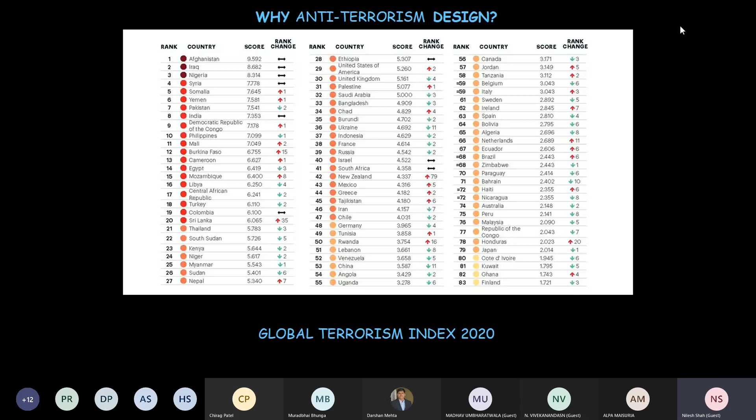So India has a GTI of 7.4, Pakistan has a GTI of 7.5, Yemen has GTI of 7.5, Somalia has 7.6, Syria 7.7, and Afghanistan tops it with a GTI of 9.6. So out of these more than 150 countries of the world, India stands at rank number 8, suggesting that the impact of terrorism is very high for our country.

Now, this is a comparison of top 10 countries over past many years as far as terrorist activities are concerned in terms of the GTI score which the country will carry. As shown here, every one of us will be surprised to know that in 2002, the rank of Afghanistan was 16, and it carried forward until 2004, where the Afghanistan rank was more than 10 from GTI of all the countries.

But from 2005 onwards, this rank kept on increasing, and in 2018 and 2019, Afghanistan has topped the GTI, meaning that the impact of terrorism is highest in Afghanistan amongst all countries of the world. Iraq over last decade has remained at rank number 1 to rank number 2. Nigeria rank number 3 to rank number 4. Syria 4 to 5 over last 5 to 6 years, and Somalia has come to rank number 5 in 2019.

If you look at Pakistan, then even in 2002, you will realize that Pakistan was ranked at number 12, while India was ranked at number 2. In 2002, 2003, 2004, and 2005, up to say 2011 or 2012, India's rank was from 2 to 5 only, which is, I think, a great matter of concern for all of us.

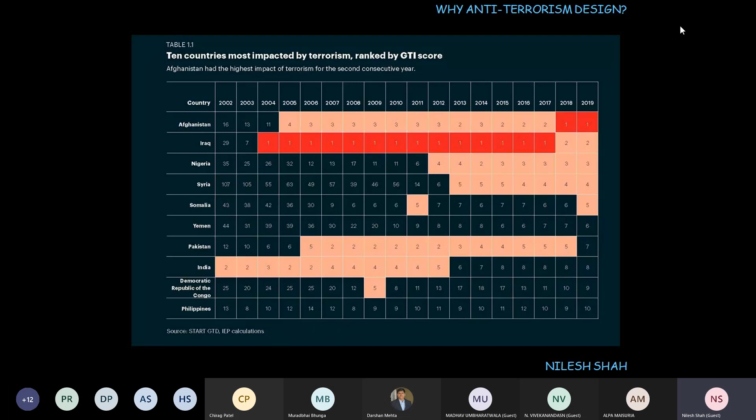So, a lot of improvement has been done in India from 2002 to 2019 to bring the GTI index down from rank number 2 to rank number 8, while Pakistan in 2002 was ranked at number 12, and the rank has increased in 2019 to rank number 7, right? So considering all these aspects, we cannot say that India is a country where terrorist activities are not there.

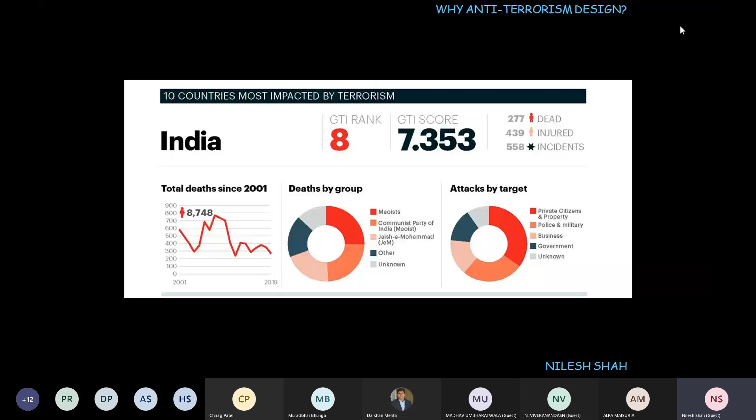So why anti-terrorism design is required? Because our infrastructure, our properties, or our buildings that we are designing are subjected to terrorist attack. India ranks amongst top 10 countries in the world where the impact of terrorism is very high, and this impact results in loss of life of people. This impact results in the disturbance or the collapse of the infrastructure facilities as well as building facilities or properties of an individual or the government.

That is why we as an engineer should be involved in planning the anti-terrorism strategies for the whole country, with specific reference to design of infrastructure and buildings. That is where civil engineering and structural engineering will come in picture. That is where architectural people will come in picture.

There has to be a trend started in near future, that those buildings which are very important, those buildings which are in a certain likelihood of terrorist attack kind of neighborhood, should be compulsorily designed for a specific threat level, for a specific type of terrorist attack strategy. The days are not far away. I see that this will be an immediate future and this will be required in future,

though there are no standards available currently, right? So that is the first part of the presentation, why anti-terrorism design is required, because India is very much susceptible to terrorist attacks. A lot of lives are lost, a lot of property is damaged, infrastructure is lost. Therefore, we must try to design our infrastructure as well as property for anti-terrorism concept.

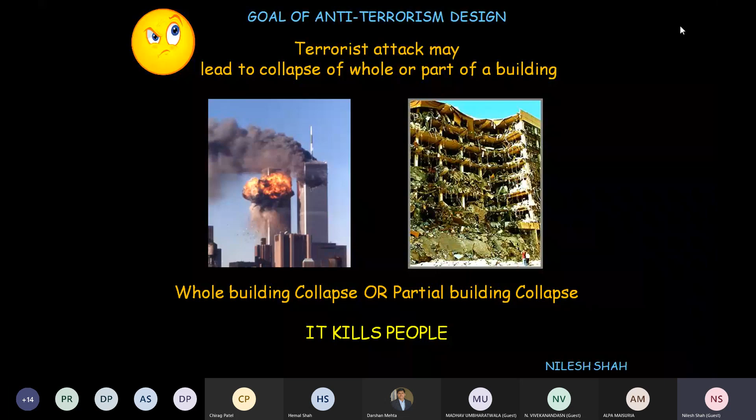So we may not be able to prevent or eliminate terrorist attack as a civil engineer, structural engineer, or an architect. It's not our job. It's not within our domain to prevent and eliminate the terrorist attack. The onus falls onto the shoulders of the authorities, right? But we can design buildings to prevent collapse under terrorist attack, right?

So what is the goal of anti-terrorism design? Like in earthquake resistant design or wind resistant design, the goal is to minimize the loss of human life. Likewise, here also, the goal of anti-terrorism design is to minimize the loss of human life. How do we minimize this?

We design our buildings to sustain a specific threat level, a specific type of terrorist attack, a well-defined terrorist attack, so that when that specific type of terrorist attack takes place on a particular infrastructure or a building, or a certain level of threat is realized during its useful lifespan, then the building does not collapse, or the local collapse of the building does not take place, killing people, right?

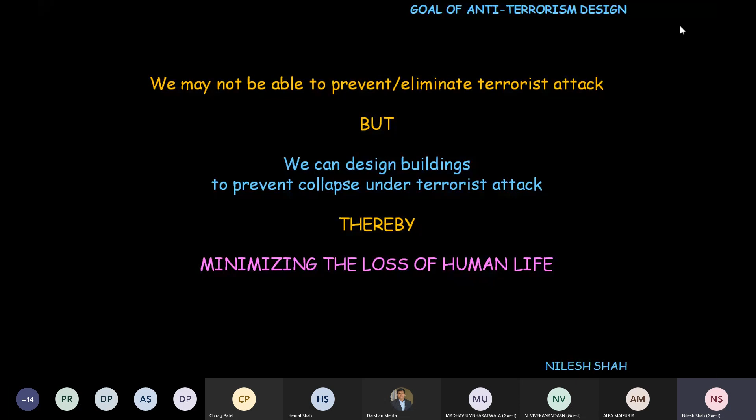So our design goal should be to minimize the loss of human life by making buildings which do not collapse due to terrorist attack for a specific threat level and for a specific strategy. Okay, now we have been talking about various terrorist strategies, right? That for a particular type of terrorist strategy, we should be able to design buildings. So let us know about various anti-terrorism strategies.

There are actually 4 anti-terrorism strategies listed here. First is deception. Second is intelligence measures. Third is physical and operational protection. And fourth is structural hardening.

Now, when I say these are the anti-terrorism strategies, many of these are terrorism strategies also. That is, the terrorist would be using many of these strategies too. For example, deception - the terrorists may use this strategy.

If you have seen old movies like James Bond movies, or any of our old Hindi movies of the 1980s - in Hindi movies there used to be a person who does a lot of charity in society and has a very good impression, like he is a great donor, a helping hand to the poor people of society. But in fact he has constructed his own bungalow such that they have a bookshelf in the bungalow, but if you move the bookshelf, it opens to a den, and this den is the area from where he carries out all illegal activities, maybe smuggling of gold, or distribution of liquor or drugs in the society.

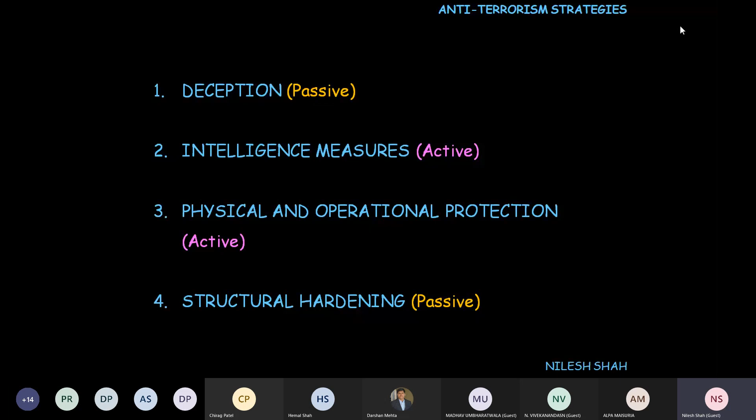So basically there are four anti-terrorism strategies: deception, which is a passive strategy; intelligence measures, which is an active strategy; physical and operational protection, which is an active strategy; and structural hardening, which is a passive strategy.

So what is deception? A building or facility is made to appear more low risk or more protected, and therefore the attacker is misdirected. If you have a very important building to be protected, you change the appearance of the building so it appears from outside as, say, a hospital, while in fact it is the main headquarter for an intelligence agency, a government treasury, or whatever. So people from outside do not realize it is a particular facility, and the attacker is misdirected, not realizing this is the target he is looking for. So it is a passive kind of strategy.

Second is intelligence measures, an active type of strategy. It means understanding, preventing, and preempting the moves of the terrorists. This is what the Intelligence Bureau, RAW, and other agencies in each country, or the FBI, have been doing - keeping their eyes and ears open. They have agents moving around in society to find out likely terrorist attacks based on clues available through telephonic discussions which they trap, or through videos or cameras. So intelligence measures is an anti-terrorism strategy which helps prevent or counter a terrorist attack. For example, we had earlier indications that on a particular day like 15th August or 26th January, certain cities of Gujarat or Maharashtra were likely to be attacked by terrorists. In the past, such awareness was created among government authorities, and they were requested to take full protection measures to curb any likely attack. So this is intelligence measure, an active type of anti-terrorism strategy.

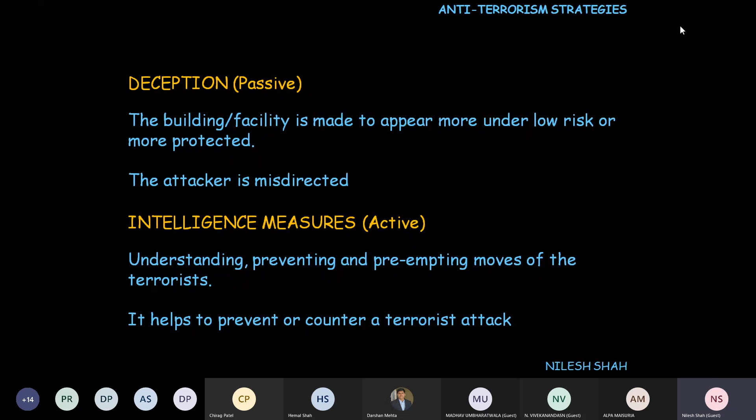Physical and operational protection is also an active type of strategy, which includes CCTV surveillance, providing security measures including security guards and other security barriers, providing sensors, etc., to help identify, prevent, and counter a terrorist attack. As you all know, around 6 to 7 years ago, the city of Surat was perhaps the first city in the whole of Gujarat, or the whole country, to install CCTVs in public areas - on public roads, malls, near cinema theaters, and everywhere for surveillance. That has helped reduce the crime rate to a great extent, and whatever crime takes place, it is very easy to find the culprit. So physical and operational protection facility is an active type of anti-terrorism strategy, now getting involved in several cities through CCTV surveillance, security barriers, security guards, and specific sensors being installed in public areas.

Next is serpentine access. This is also very important - providing fences, perimeter protection, buffer zones, etc. If you have a very important building, and you provide access from the road to that building's entrance, usually to reduce the cost of infrastructure, roads, or approaches, we take the minimum distance - a straight line from the road directly to the entrance, providing the minimum length of road. This should be avoided in anti-terrorism design, because a shortest distance or approach to the entrance means terrorists will reach the entrance in minimum time, without you noticing them, or without security and other people getting enough time to counter their attack.

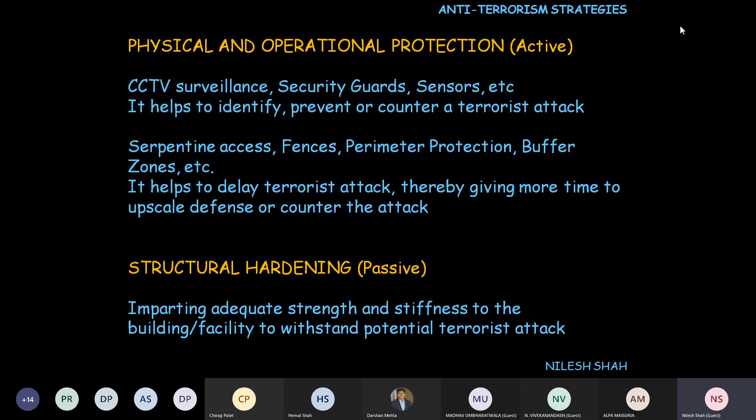So we have gone through four types of anti-terrorism strategies. Of these, the first three - deception, intelligence, and physical and operational protection - are, in fact, also used by terrorists as terrorism strategies. As they say in Hindi, loha lohe ko kaatata hai - iron cuts iron. So whatever strategies terrorists are using, the same strategies can be used for anti-terrorism also. That is the idea of defense strategy.

Now, usually or ideally, any building designed for ATD, anti-terrorism design, should have all four measures placed in layers. When I say placed in layers, it means the attacker will encounter them one by one in sequence. For example, as shown in this chart, first the attacker will encounter the deception strategy, then the intelligence strategy, then the physical and operational protection type of strategy, and then the structural hardening type of strategy. So when all these four anti-terrorism strategies are put into sequence in any order of priority, the attacker will have to spend a lot of time.

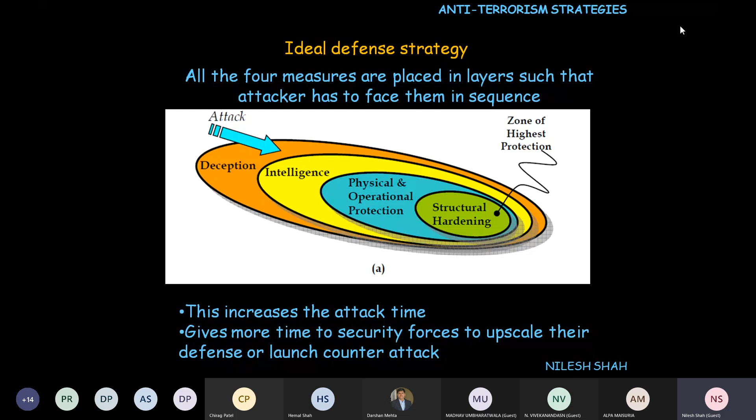Okay, what actually happens in practice is that the defense strategies will overlap and they may appear together. For example, I have shown a zone of highest protection at the core, at the center, and then the different strategies will overlap each other. So there may be an attacker who chooses a particular type of approach wherein he has to encounter only deception and physical operational protection, and then structural hardening. So ideally the strategy should be planned in sequence so it is encountered one by one, but practically it is seldom possible, and the strategies would overlap with each other. We have to keep this in mind.

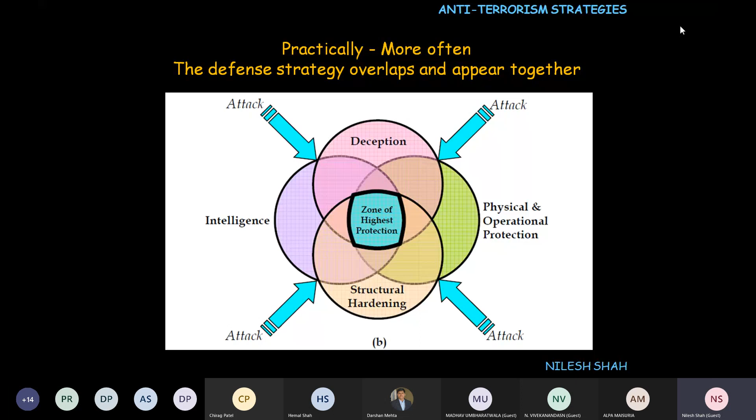Okay, so we have been through all these strategies, like four strategies that we have seen: deception and intelligence measures, and physical and operational protection, right? They are general, common. But as an engineer, we are most concerned with the last anti-terrorism strategy, which is called structural hardening, right? It is the final and most important frontier of anti-terrorism design, because the other strategies that we had visited are kind of preventive strategies, while this is the strategy which will actually save the lives of people when the building or infrastructure facilities are attacked.

Because by structural hardening, our goal is to prevent the collapse of the building so that the people inside the building and the data or the objects inside the building are not affected by it. Okay, so when all other measures fail, structural hardening helps in saving the lives of people. It can give you more time to facilitate evacuation. It will also give you time for rescue. It will prevent the collapse of the building and prevent injuries from flying debris of non-structural elements, right?

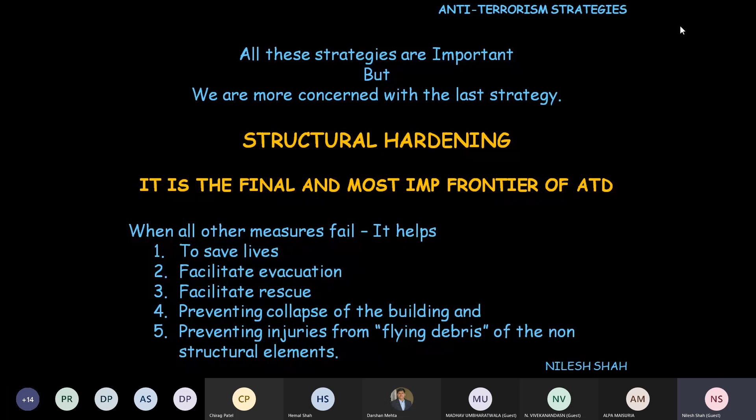So structural hardening is the anti-terrorism strategy which we are directly dealing with as a civil engineer, as an architect, or a structural engineer, right? So architects, civil engineers, structural engineers shoulder added responsibilities to mitigate the effect of terrorist attack. Now, how do we deal with structural hardening? We can design buildings to withstand terrorist attack without collapse and protect the lives of the people.

Do you remember what was the goal of anti-terrorism design? It is to minimize the loss of human life by designing buildings which do not collapse during a terrorist attack, right? Okay, so we are through with different types of anti-terrorism strategies. Let us identify various issues in anti-terrorism design, and then we will have an overview of ATD.

In the meantime, are there any points for discussion from the participants? Then I'll be happy to attend to them. I hope all of you are attentive to the presentation. Are there any points for discussion? We can discuss it right now. Darshan bhai? Yes, Nilesh sir. So I feel, I don't know how many of the participants are attentive. Those who are attentive can just raise their hand. All the participants are requested to write in the chat box, either yes, no, whatever, so that I can realize whether you are attentive or not. Because we don't want one-way communication. We want an interactive session. Exactly. So I can see four or five hands up. That is really good. But those who wish to interact right now can interact based on whatever has been presented till now. It is open for everyone.

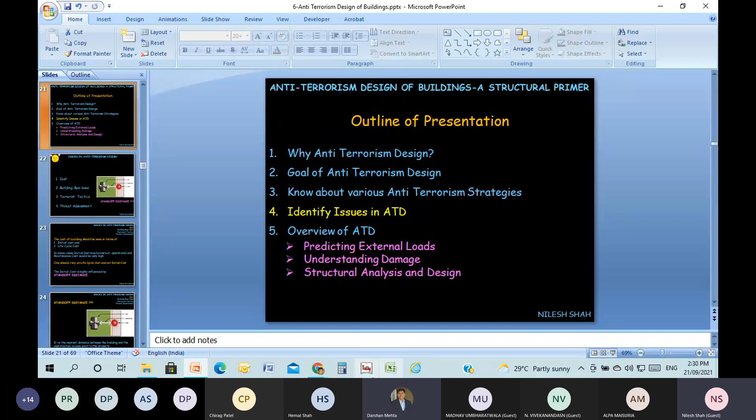So let us identify various issues involved. Sir, there is one question from Arora sir, who is a professor in GEC Bharuch: do we need to design blast resistant buildings? How to consider energy? Yeah, exactly. Arora ji, when we come to the analysis and design part of this, I will highlight that, because terrorist attack through explosion is the main thing for which we have to design. And for a specific type of explosion, how to evaluate the load, that I will highlight in the presentation.

But as I told you earlier, it will be only conceptual things that we will be discussing here, and I can suggest several references which would be very helpful to you in designing, right? So we are going to discuss that. So I hope you will wait for a few more minutes till we reach that particular topic. Is that okay?

Okay, shall we move ahead then and identify issues in ATD? Okay, what are the issues in anti-terrorism design? Again, this is from a general perspective, not only from the engineering point of view. The four major issues with anti-terrorism design are: first, cost; second is building bylaws; third is terrorist tactics; and fourth is threat assessment. We are going to see each one of them one by one.

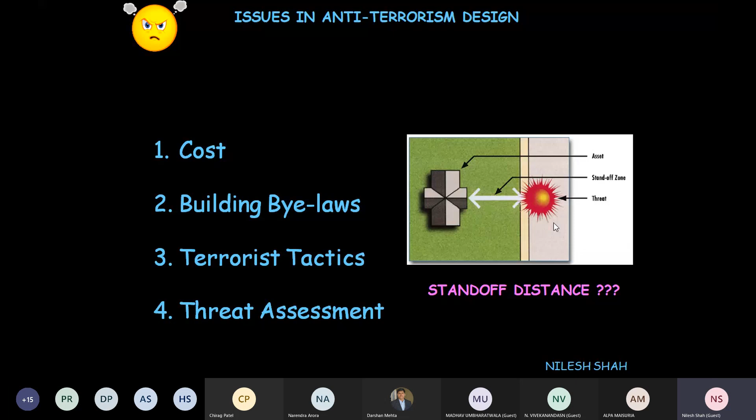So when we discuss cost of an anti-terrorism design, this plays a major role. Therefore, I have shown this figure here, right? So there are four issues that we need to understand and realize before we do ATD, that is anti-terrorism design. First issue is cost, second is building bylaws, third is terrorist tactics, and fourth is threat assessment. Okay, let us discuss them one by one.

First is cost. Now, usually, see, in civil engineering or structural engineering or architecture, whatever cost we assign to a building till this point of time was the initial cost only.

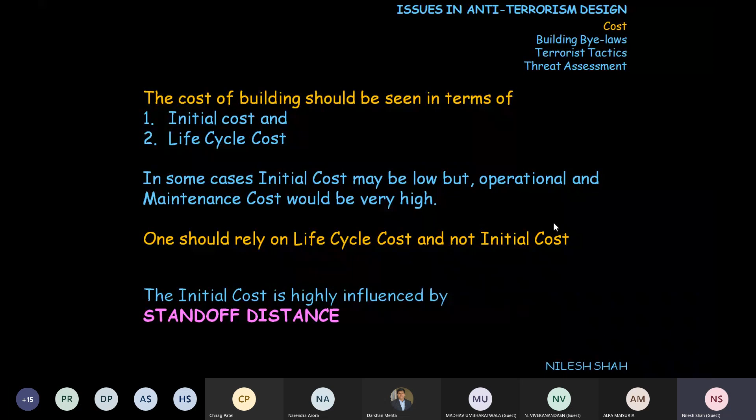So what is the standoff distance? That figure I'm again discussing here. It is the nearest distance between the building or the facade of the building and the unprotected access point to the property. That is the initiation of threat, right? That is called a standoff distance.

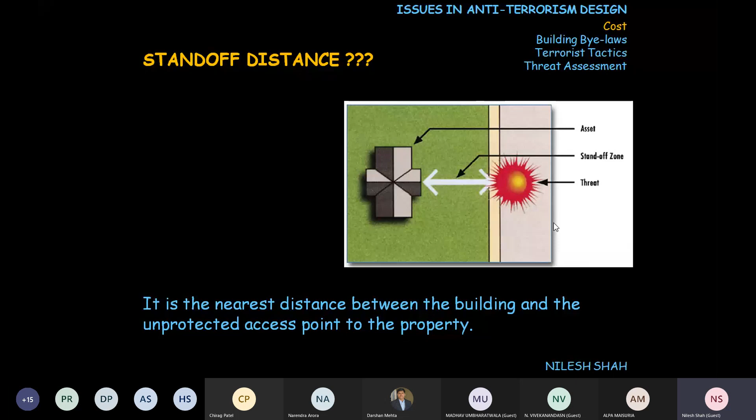Okay, now there are two types of cost. One is variable cost and the other is fixed cost. Variable cost deals with the additional cost that will be incurred for structural hardening. That is to impart adequate strength and stiffness to the structure for a terrorist attack, right? So it depends on the type of terrorist attack. It depends on the standoff distance. It depends on the anti-terrorism strategies that you will be using. It depends on the threat level, right?

So therefore, because it depends on so many different things, the cost of structural hardening will vary depending on the decision or the level of threat that you choose, right? So therefore, it is called a variable cost. Likewise, the cost of land incurred for a project is also a variable cost, because it depends on the standoff distance, which is minimum 50 feet, right? So if you choose to construct a building with ATD, then the cost of land will vary depending on the standoff distance also, right? Therefore, it is a variable cost, which is not the case in case of other ordinary designs, right?

While the fixed cost could be the cost for the building envelope, that is for architectural, non-structural elements that you provide a facade for the building, and the cost for other operational measures, maintenance measures, which incorporates the intelligence measures also, which incorporates the CCTV surveillance, security barricades, and other things. These are the fixed costs, right? So different types of costs which are involved is highlighted here.

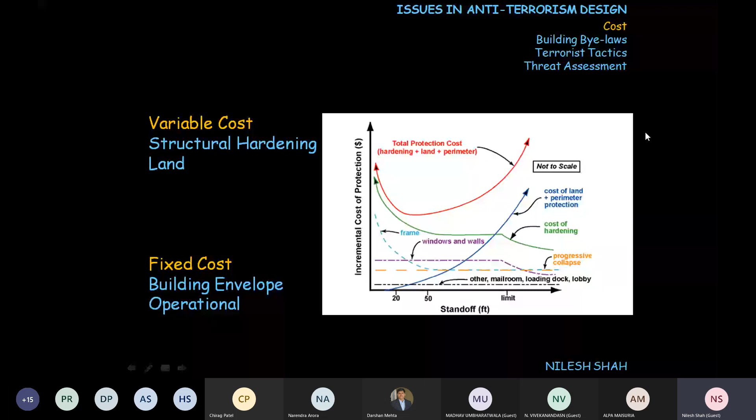It is cost attributed to implementation of anti-terrorism strategy that is affected by standoff distance, type of terrorist attack, that is armed or explosion or arson, and intensity of terrorist attack, that is amount of charge used. And fixed cost is not affected by the threat level, that is cost attributed to security, surveillance, intelligence, deception, etc., right? Okay, let us look at the next issue.

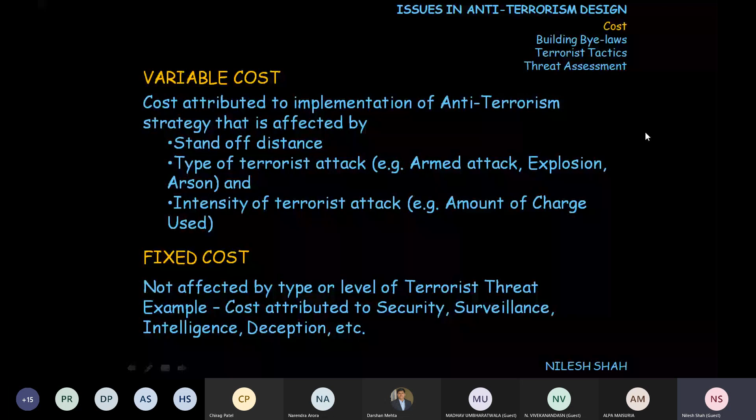So first issue is cost. In ATD, we must realize that when we try to do ATD, the cost will be exceptionally higher than the design that we do for normal gravity loads or earthquake loads or wind loads or any other accidental load, right? Because here we are dealing with terrorist attack, indirectly we are dealing with blast, and therefore the cost incurred will be very high. Second issue is regarding building bylaws.

Okay, as on the date, no country of the world has come out with standardization or standard building bylaws giving prescription for anti-terrorism design, right? It is available for hazards like earthquake, wind, fire, and so on. For example, for fire, we have minimum fire rating for 2 hours of fire resistance to 4 hours, 6 hours, 8 hours of fire resistance. Different prescription is given for concrete cover and for design.

Likewise, for earthquake also, different prescriptions are available in building bylaws that you have to follow, NBC. You have to do a particular type of analysis, particular type of design for earthquake and wind forces. So there are building bylaws available for earthquake, wind, and fire, but they are not available for anti-terrorism design. Reason may be due to shortage of information available.

Though when we started working on this in 2005, very limited information was available, now a lot of information is available. But they have not been standardized. Okay, maybe due to limited understanding of damages due to such attacks, maybe due to lack of data on attacks and consequences of such damages, no cost benefit studies, and not much academic and technical experimentation has been done on this, right?

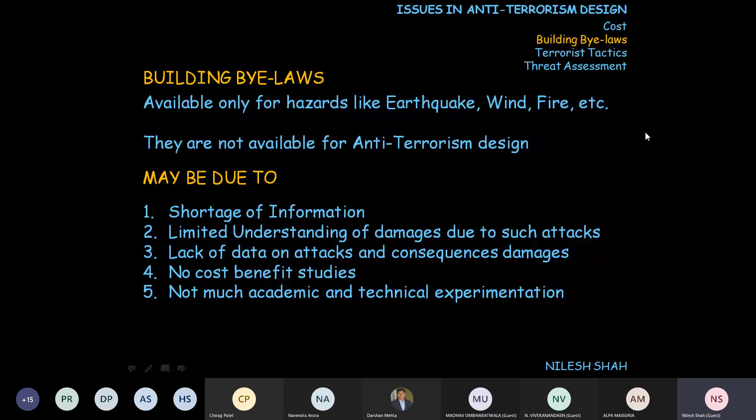So we actually need building bylaws that may contain zoning of neighborhoods. For example, building bylaws of Gujarat, if I talk about, then we should have a provision in building bylaws that those cities or villages or areas which are abutting the border of the nation, okay, between India and Pakistan or India and Afghanistan or whatever it is, right? Those respective states should identify such areas because they are more susceptible to terrorist attacks, okay, or military attacks also.

So we should have zoning in the whole of country, that wherever it is abutting the borders or it is abutting the areas of terrorist activities, particular buildings in those zones should be designed considering anti-terrorism design by specific threat level, by specific type of terrorist attacks, right? So that zoning of neighborhood should be available.

Second is site planning. This is what I discussed earlier, that if we are considering ATD, the site planning should consider buffer zone also. Site planning should consider serpentine access also, which should be mentioned in building bylaws. Architectural aspects, there are several architectural aspects we need to keep in mind even for earthquake and wind zone, like re-entrant corners. The building should have simple shapes. The building should not have abrupt changes in stiffness with reference to its height and width and so on, right?

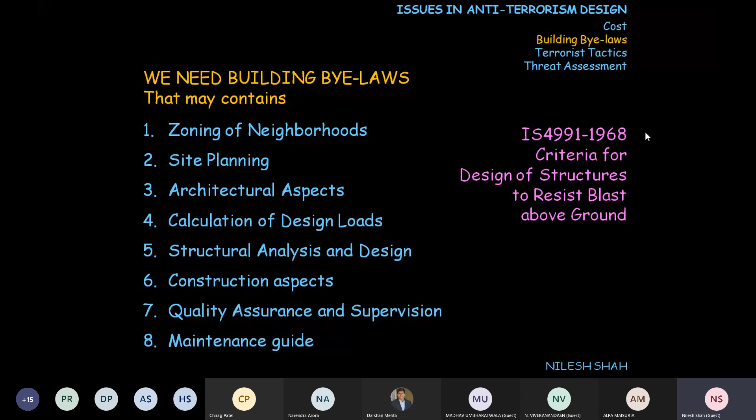But this is more dealing with the kind of blast in chemical factories, or blast taking place due to failure of mechanical vessels and other things, not with specific reference to terrorist attack. Okay, so this simple structural guideline is available for design of structures to resist blast. Okay, fine. So that is the second issue.

First is cost, exorbitantly high. Second is building bylaws. No benchmark is available. No parameters are available. No guidance is available regarding minimum standards that we need to observe for ATD in building bylaws, right? Third is terrorist tactics.

Okay, a lot of research is going on these terrorist tactics, about what type of terrorist tactic is to be considered for ATD, right? But I think the field is wide open because academics and research oriented to earthquake, wind, or ATD moves slower than the terrorism activities, because the development in the negative side takes place very fast. It is highly accelerated. The pace of development in those fields is very high.

If you remember, in World Trade Center, no one has thought that one can demolish a building by the impact of an aircraft also. Till that point of time, we were thinking that there could be an attack because of missile. There could be an armed attack, like people carrying weapons will go to the building, or sometimes people may feel that the attack could be in terms of a vehicle filled with charges and causing a collision at the ground floor of the building and so on.

No one thought that you can demolish an iconic building by crashing an aircraft into a building. So the terrorist tactics and the terrorist activities are oriented in such a way that the development has taken place very fast in those things, rather than preventing them or designing them, right?

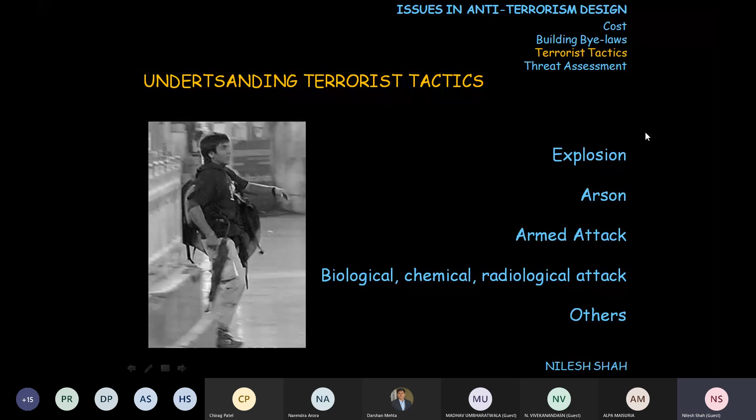So different types of terrorist tactics which I have mentioned here are: first is explosion, second is arson, armed attacks, biological, chemical, radiological attacks, and others. Let us see them quickly. First is explosion. The explosion could be airborne, or it could be grounded detonation of explosive devices on or near the targets.

Okay, the explosives can be carried by hand. Okay, in terms of hand grenade also it can be done. It can be delivered by vehicles. It can be hurled as projectile, or it can be placed through usual supplies in the buildings. We have suicide bombers also. Certain attacks are carried out by suicide bombers. Like the death of our ex Prime Minister Rajiv Gandhi was due to suicide bomber.

Okay, certain terrorist attacks that have taken place are armed attacks, but certain terrorist attacks are because of the charges delivered by vehicles, two-wheeler or a four-wheeler, right? So they fall under the category of explosion. Simultaneous use of more than one of the above devices enhances the intensity of threat, and using chain of detonators enhances the duration of threat and extent of damage.

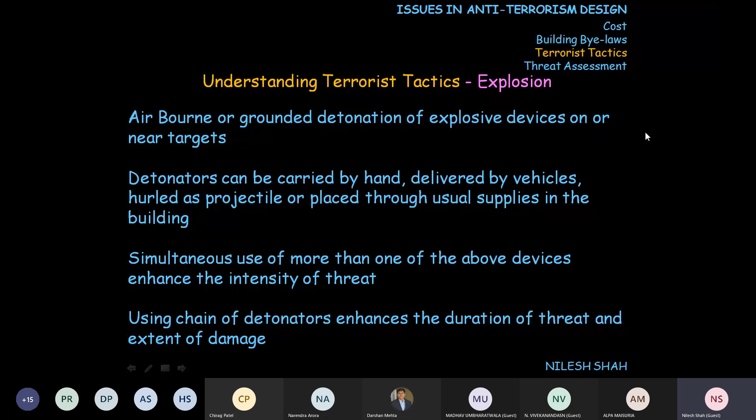Like for example, in Mumbai also there were several attacks. They were chain of attacks in the public places by explosions. Like one explosion took place and then another explosion took place 5 minutes after that. Another explosion took place at other area, nearby area, 10 minutes after that. So chain of detonators, right? So it enhances the duration of threat, and it intensifies the extent of damages.

It causes instantaneous damage to the building. Explosion we are talking about. The extent of damage is determined by the type, quality, and quantity of the detonators used and the standoff distance from the building. It covers the loss of non-structural elements, damage to structural elements, loss of structural elements, and progressive collapse of part of the building or a whole building. Right? World Trade Center is a great example of collapse of the building because of the explosion, right?

Second terrorist tactic is arson, which is initiation of fire at or near the target, right? It can be initiated by direct contact or by a projectile carrying an accelerant. Duration could last from minutes to hours or days. Again, extent of damage is determined by the type and quantity of devices used, materials used, and it covers damage to structural, non-structural elements, loss of structural, non-structural elements, and progressive collapse of the part or whole building.

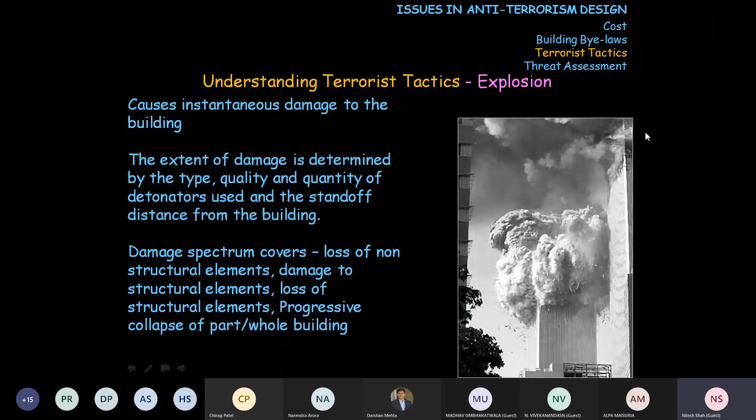Now, the question arises that World Trade Center, it could be because of this explosion. The initiation of collapse was because of the explosion, but because of arson also, that is the initiation of fire.

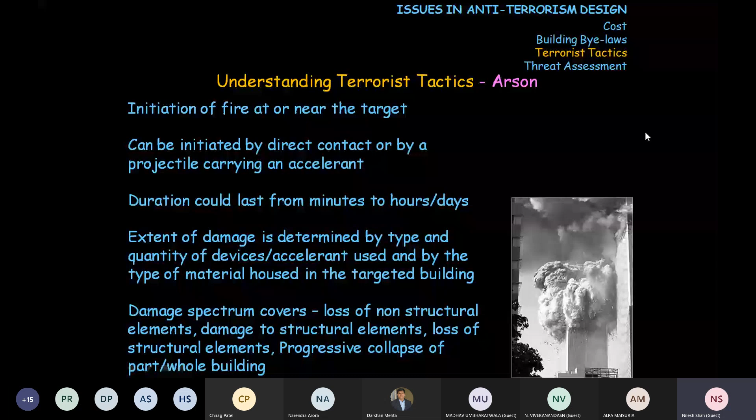Because of that particular explosion, the steel structural members of the building, the main load bearing members made up of steel floors using joists and steel columns, melted due to the high temperature they experienced from the fire and gave up. So the collapse of World Trade Center in this case was attributed not only to explosion but also to arson.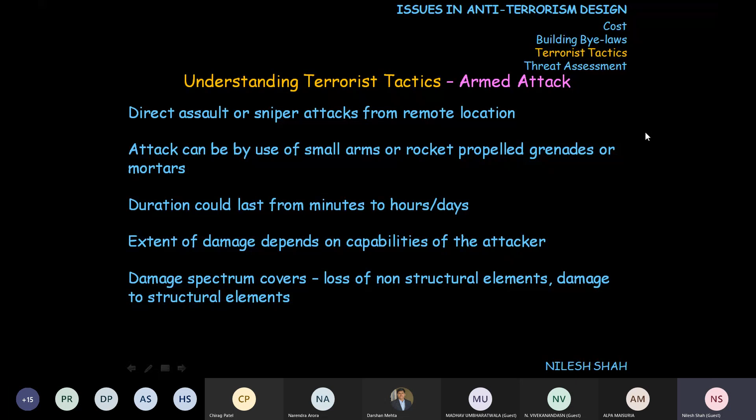Duration could last from minutes to hours to days. Extent of damage depends on the capabilities of the attacker, and the damage spectrum covers loss of non-structural elements and damage to structural elements. I think we need to move a little quicker to finish at least 15 minutes before the scheduled time of 3:30.

The next terrorist tactic is biological, chemical, radiological attack. This is a very innovative terrorism technique, involving contamination or dispersion of the built environment leading to harmful effects on humans and biological life. For example, this coronavirus - in the earlier stages of its appearance, people thought it was a kind of strategy devised by China, releasing this virus all across the globe.

So that they have benefits of economy - other countries will go down in economy and China will have a better upper hand in economy. So this is also a kind of biological attack that we can think about.

Contamination could be biological, chemical, or radiological. For example, sometimes people say that in a particular reservoir, certain types of chemicals can be released, and if that water goes to the cities and people drink it, there may be a lot of loss of human life due to that also.

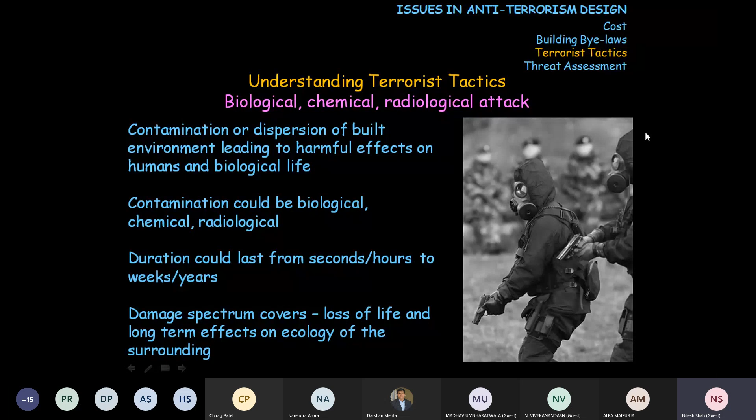Even in agriculture, certain kinds of pesticides given to farms can cause the produce we get to have a mild effect on people, and over a longer duration it will affect and cause many fatal diseases. So this is related to biological, chemical, and radiological attacks.

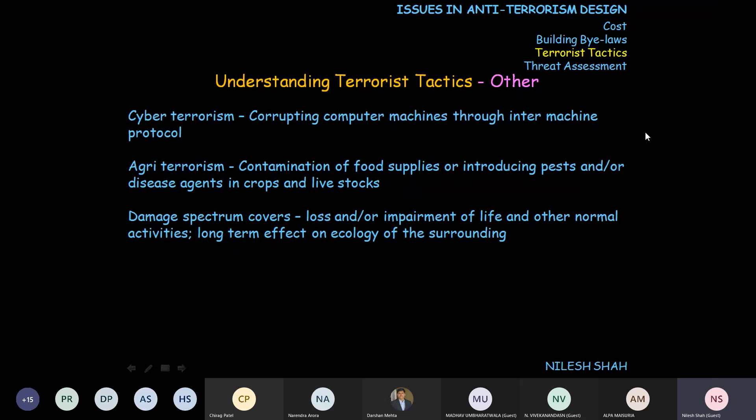Others include cyber terrorism and agri-terrorism - contamination of food supplies or introducing pests or disease agents in crops and livestock. The damage spectrum would cover loss of life, impairment of life and normal activities, and long-term effects on the economy and ecology of the surrounding area. So this is regarding the different types of terrorist tactics that could be there.

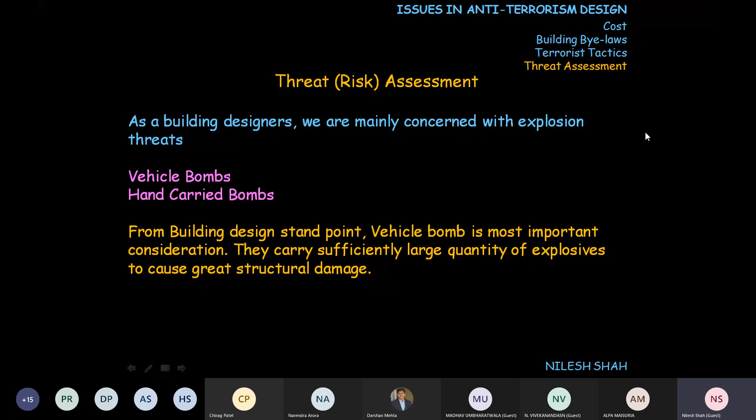Threat assessment: as a building designer or engineer, we are mainly concerned with threats related to explosion. This could be either vehicle bombs or hand carried bombs. From a building design standpoint, the vehicle bomb or suicide bomber is the most important consideration, as they carry sufficiently large quantities of explosive to cause great structural damage.

These are the recommendations available in literature, which I will mention later in the presentation. For a low threat level, what kind of construction or design is required is a minimum 50 meter standoff distance, with no special treatment of the structure. Security provisions could include intruder detection, CCTV, manned guard provision, access control, and personnel and baggage screening - this is the type of operation, maintenance, and construction required.

If risk is assessed to be negligible, then the low level is adopted, with no impact on current costs for design or construction apart from imposition of a security culture and appropriate provisions. So no additional cost for structural hardening is required for low threat level. This would depend on the risk assessment for the facility, the level of secure information stored on site, and the level of protection deemed necessary for the personnel.

For moderate threat level, here also a 50 meter standoff distance is required, with structural design for robustness to prevent disproportionate collapse - that is, we are talking about robust structural design, indirectly referring to design for progressive collapse, which we will see shortly. Glazing should include laminated glasses, so that during collapse, the debris of the glasses does not affect individuals.

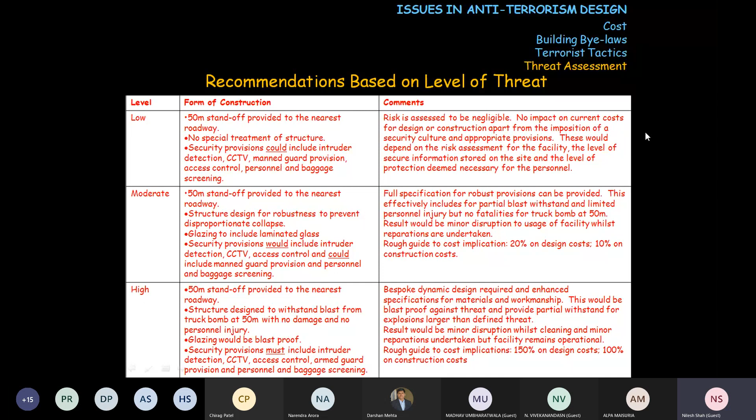So it is a costly affair depending on the level of threats that we are using. This was related to identifying various issues in ATD, which includes the cost, the assessment of threat, various types of terrorist tactics, and so on. Right now, let us quickly overview the anti-terrorism design in 3 steps.

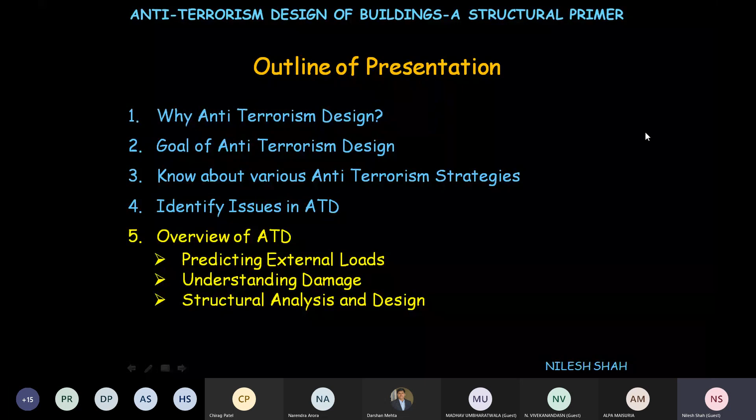First is predicting external loads, second is understanding damage, and third is structural analysis and design that we need to incorporate. I'm moving slightly quickly, so predicting external loads - the intensity of external loads will depend on various aspects like the estimated likelihood of terrorist attack. What is the probability of having a terrorist attack here? And the terrorist tactics used - what kind of terrorist tactics is used?

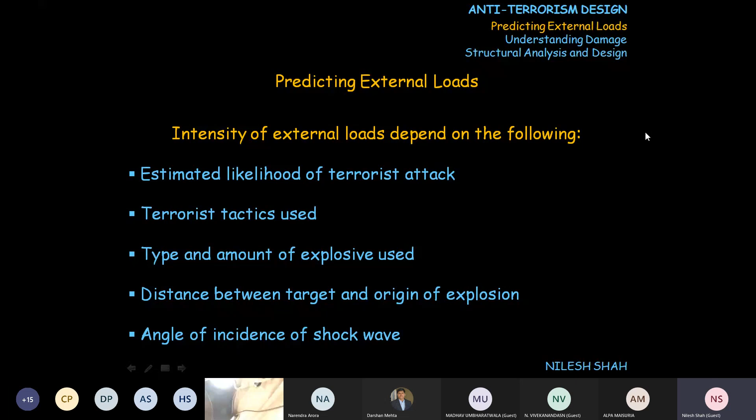For example, a missile, hand thrown grenade, suicide bomber, or a vehicle bomb, and so on. Type and amount of explosive used - what is the maximum weight of explosive that can be used? Distance between the target and the origin of explosion, that is standoff distance, and angle of incidence of shock wave. Right now, I would like to show you this particular table, which gives certain values of the parameters here, which can be useful for our design.

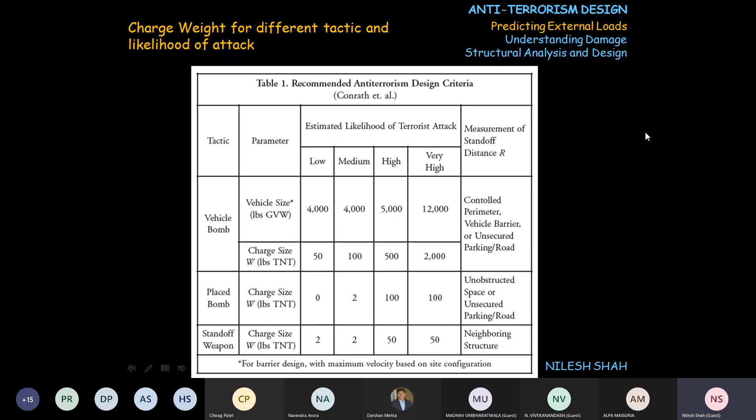For high threat level, a TNT weight of 50 pounds is to be considered when the projectile is hurled at the building being designed. These are general guidelines available regarding the TNT weight or charge weight you need to consider in order to evaluate the load coming onto the structure.

When the shock wave is transmitted, it meets the obstruction surface, that is the facade of the building, and there a reflected pressure is generated. Whenever there is an obstruction, the reflected pressure is generated, which is much higher than the overpressure. So when a blast takes place unobstructed, it is overpressure, and whenever an obstruction occurs to the shock wave, the reflected pressure takes place, which is much higher than the overpressure.

Overpressure itself is much higher than the atmospheric pressure we deal with, possibly 100 times more. The reflected pressure could be at least 10 to 15 times more than the overpressure or incident pressure. Drag is also generated, not only on the face of the building directly facing the explosion, but also on the sides of the building. So this is how the blast load acts completely on the building, to understand the mechanism of blast load.

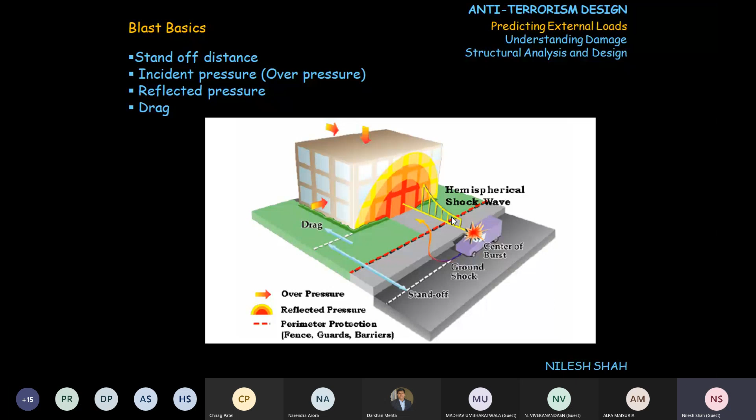For example, for a high threat level, as we had seen earlier, the cost of construction at least doubles, and the cost of design is 1.5 times the design cost we incur for seismic design.

Now, from the earlier table we have obtained the explosion weight depending on the type of tactic, that is vehicle bomb, that we have used. Once we get the explosive weight and know the standoff distance, we can use this chart to find the overpressure that can act upon the building. The overpressure ranges from 0.5 psi, pounds per square inch, to 10 psi.

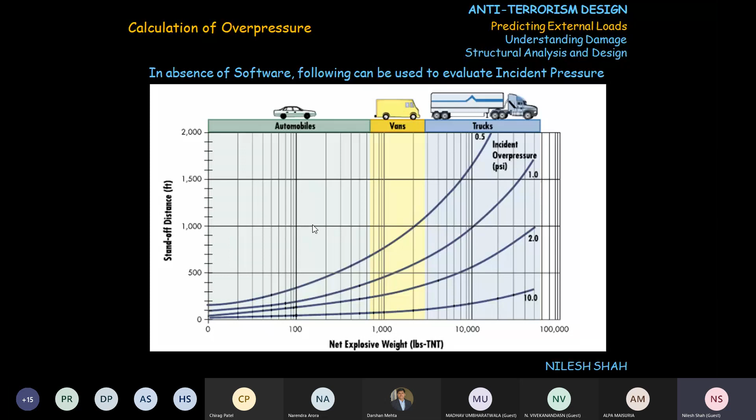For example, if you consider a net explosive weight of 100 pounds of TNT, and a standoff distance of say 50 meters, that is 150 feet, it falls somewhere on the chart where the overpressure is of the order of 1 psi. Don't treat this as a small overpressure for which we design the building lightly. The actual reflected pressure, as I told you earlier, is at least 10 to 15 times higher than the overpressure.

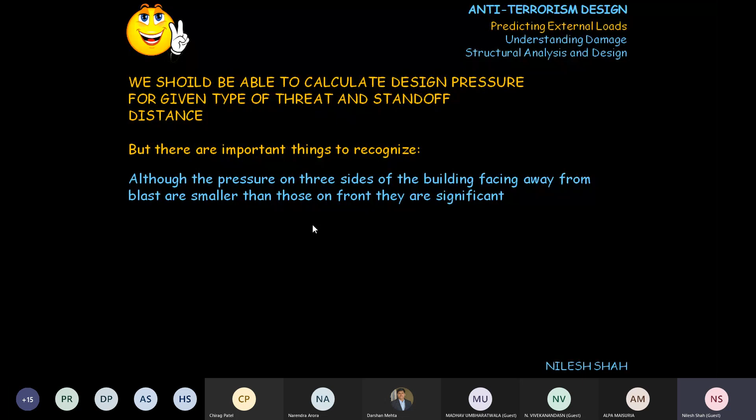So we should be able to calculate design pressure for a given type of threat and standoff distance, considering that these are the important things. Although the pressures on the three sides of the building facing away from the blast are smaller than those on the front, they are significant. As I told you earlier, there is a drag which is also acting on other sides of the building, right?

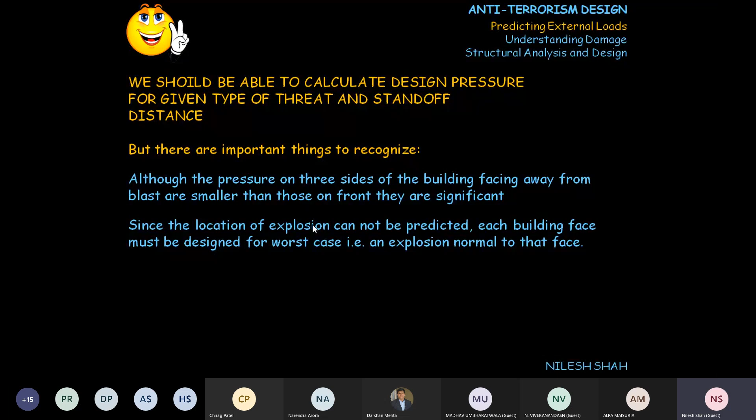Since the location of explosion cannot be predicted, each building face must be designed for the worst case, that is, explosion normal to that face. So the building should be designed for reflected pressure acting on each and every face of the building. That is, the analysis and design of the building should be carried out for several directions, not only for one direction. As we do in earthquake, we consider X and Y only, right? Here, all principal directions of the building are subjected to maximum pressure.

Okay, the different pressure values on the exposed surfaces: as I told you earlier, reflected pressure is to be considered acting perpendicular to the face of the building. The average pressure values may be considered for normal design on the whole exposed surfaces, and tributary areas are to be used to transfer this pressure onto the joints or the frames, as we do for wind load design.

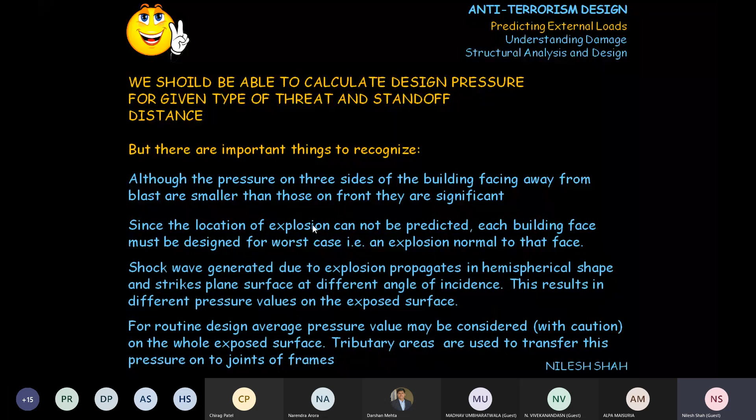So the mechanism of action of this explosion is quite different when it is an external explosion, and this is an internal explosion, right? This figure shows the internal explosion: the local damage to the floors due to internal explosion, uplift of the floors above, downward movement of the floors below, the failure of walls and windows, and venting of pressure through the various levels of the building.

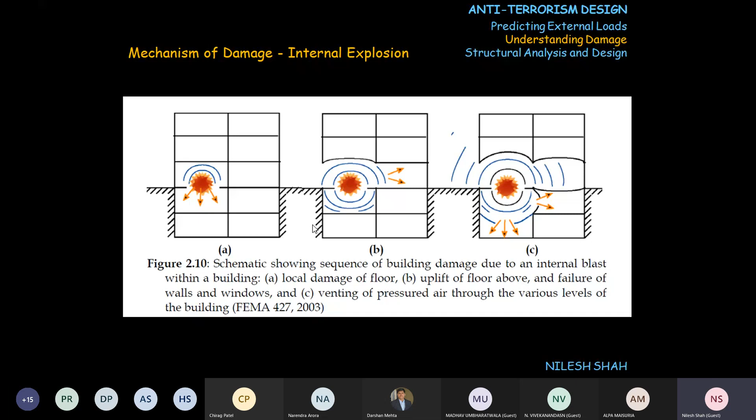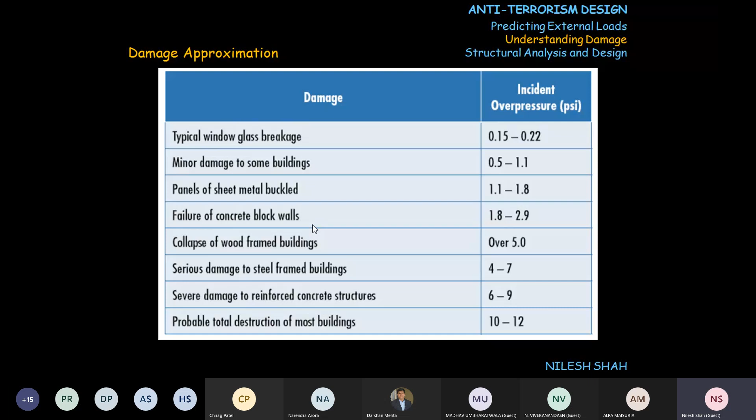Okay, just a note to highlight that high pressure air can puncture eardrums and blast open the lungs of individuals. High pressure air can shatter glass and set it airborne, which in turn penetrates the human body. So it is not only the direct collapse of the building, but the collapse or airborne nature of the non-structural things also, which is very dangerous and may result in fatalities. Adjoining buildings may sustain significant damage.

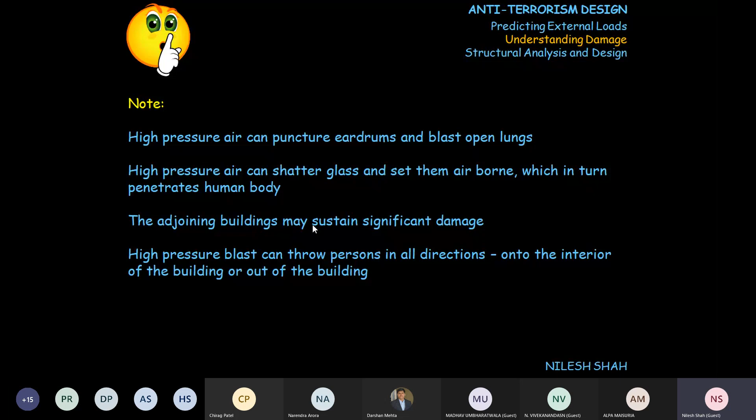High pressure blast can throw persons in all directions. The shock waves are so strong, right, they can throw individuals onto the interiors of buildings or out of the buildings. The maximum pressure evaluated is dynamic in nature and acts only for milliseconds. Now, this is very important.

What I have highlighted in pink is, by the time the inertial forces are mobilized, the loading diminishes and enhances the response. See, usually in static design or even in dynamic design for earthquake or wind forces, when the action takes place, the reaction takes place immediately, right? According to Newton's law, action and reaction are equal and opposite at a given point of time. But in this particular case, the action takes place for a fraction of a second only, and it immediately diminishes.

Sometimes it causes negative pressure also, right? And before the reaction takes place, the action has diminished. So it is very tricky and very catastrophic, because when the action is there, the reaction is not there, and when the reaction is there, only part of the action is there, or the action is not there at all, right? So both cases are exerting forces on the building, and the mobilization of reaction is not during the time the action takes place. This makes this particular phenomenon, a blast, terrorist attack or explosion, a very catastrophic event, right?

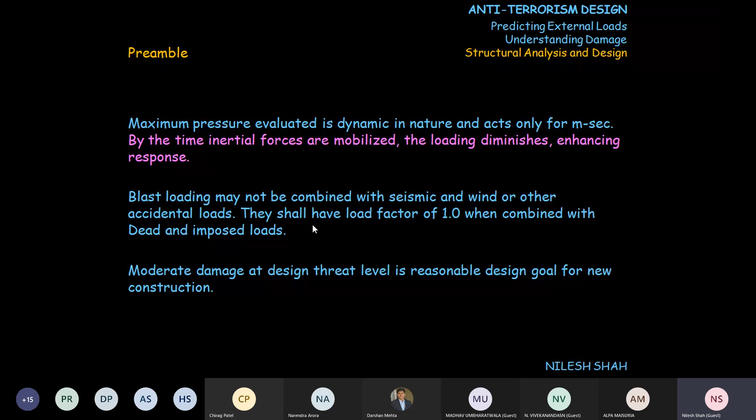Currently, there are no formal anti-terrorism performance criteria available for buildings. We need to keep this in mind. And structural hardening is the final solution, right? So the main attributes for structural hardening, or for structural analysis and design, are that we need large mass and large stiffness.

This is contrary to the fact that for earthquake and wind, we are looking for flexible buildings having lesser mass. That is, stiffness should be accommodative, right? While for anti-terrorism design, we need large mass and large stiffness.

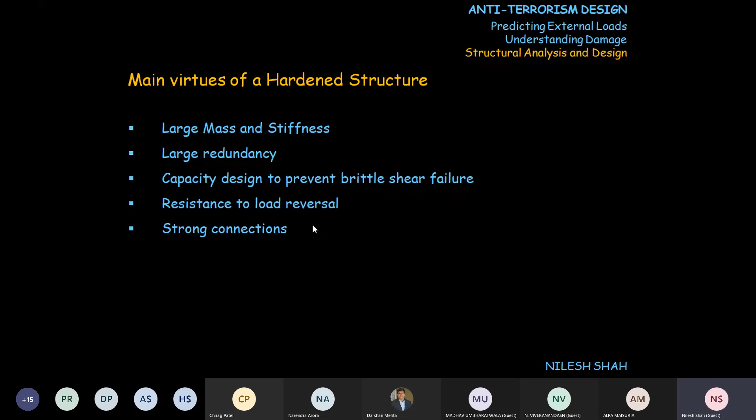We need highly redundant buildings so that several levels of defense are available. We need capacity design to prevent shear failure. We need resistance to load reversal, and we need strong connections.

Okay, now ASCE 7 proposes three types of design methods for anti-terrorism design or for blast loading, right? One is the indirect method, second is the alternate path method, and third is the specific load resistance method. The indirect method is simple prescription. For example, the table that we saw earlier for low level, medium level, and high level of threat gives simple prescriptions that we can follow. So that can be used for normal buildings.

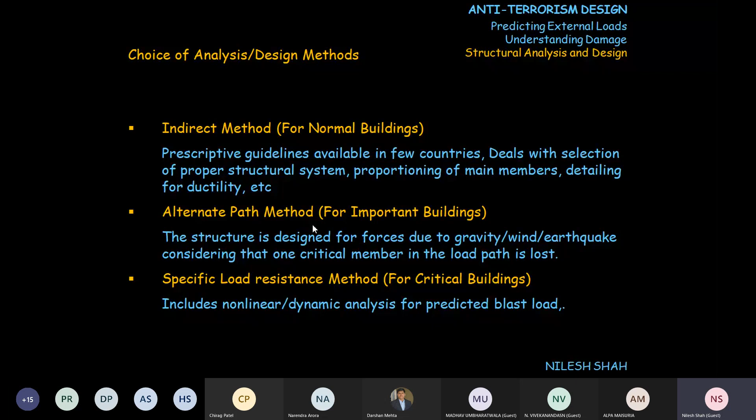For important buildings, we need to adopt the alternate path method. Now, what is the alternate path method? Here, we also call it a robust design, where one critical structural element of the building, for example a beam or column, is removed and analysis is carried out to assure that the building remains stable. And the specific load resistance method includes non-linear dynamic analysis for the predicted blast load.

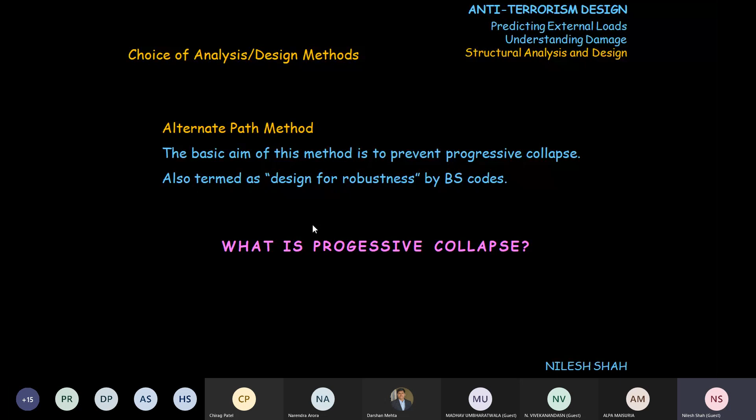Let us slightly focus on the alternate path method, which is robust design as identified by BS codes. The basic aim of this method is to prevent progressive collapse. What is progressive collapse? This is a simple flow chart, and I hope most of you are familiar with it. The World Trade Center is the best example of progressive collapse: a local collapse takes place, which initiates the sequential collapse of various members, resulting in complete collapse of the building. Due to time limitations, I am curtailing this.

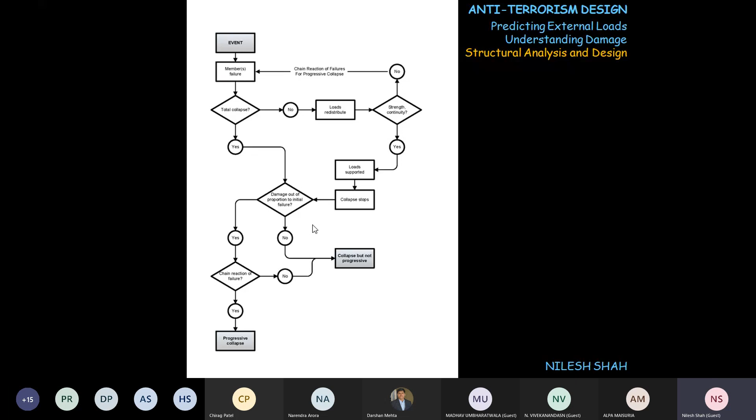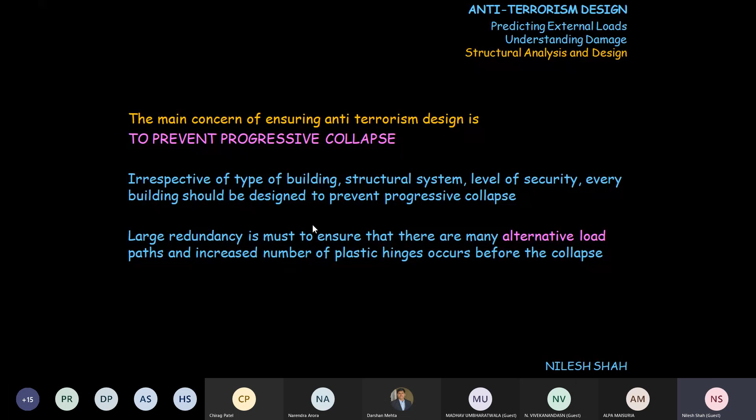So the main concern for anti-terrorism design is to prevent progressive collapse. Therefore, we need an alternate load path in the building with large redundancy so that collapse is prevented. Now, to analyze for progressive collapse, we use the alternate path method. We perform a structural analysis by removing one critical element, a vertical or horizontal element, that is a column or a beam in the load path, to simulate local damage due to a terrorist attack.

For example, if the building is so secured that no public access is available to the interiors, we can forget about the interior columns and beams. In that case, we only deal with the external columns and beams because they are targeted by terrorists. So we can remove one external column at a time and perform the analysis. The building should sustain. We can remove another column and do the analysis. So first we identify critical columns and beams, remove them one at a time, and ensure the building can sustain the predicted load.

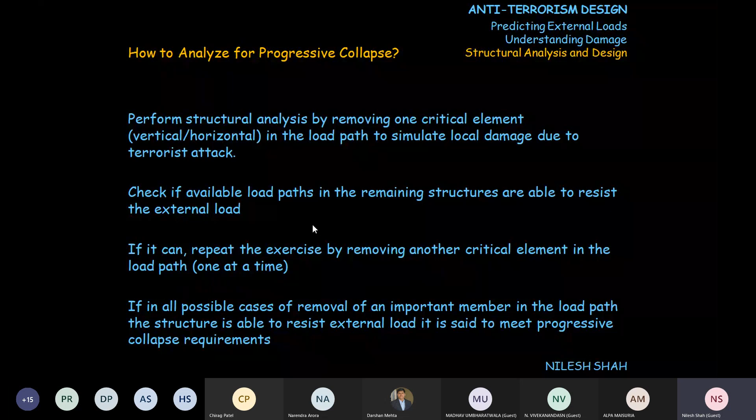By doing so, we ensure that load paths are available in the remaining structure. After removing one critical element at a time, the building should still be able to resist the external loads. This exercise is performed for more than one critical element, one at a time. In all possible cases, the structure should resist external loads. Therefore, this method is known as the alternate load path method, because even if one critical element is sacrificed, an alternate load path is available to sustain the building.

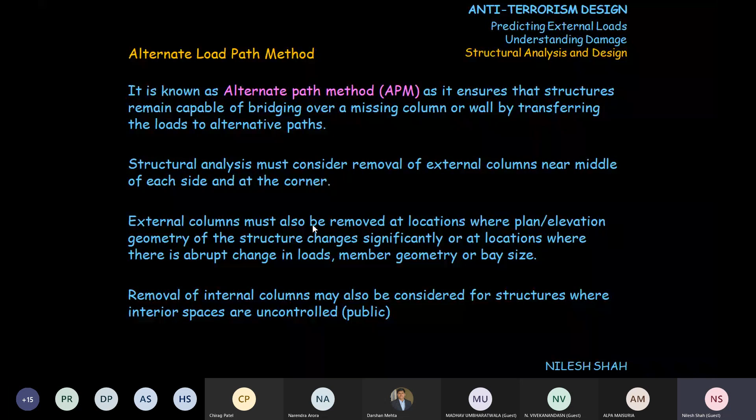Where interior access of public is also available, they are also susceptible. So then you have to identify critical internal elements also that can be removed, and still the load path is available for the building to sustain the predicted equivalent load.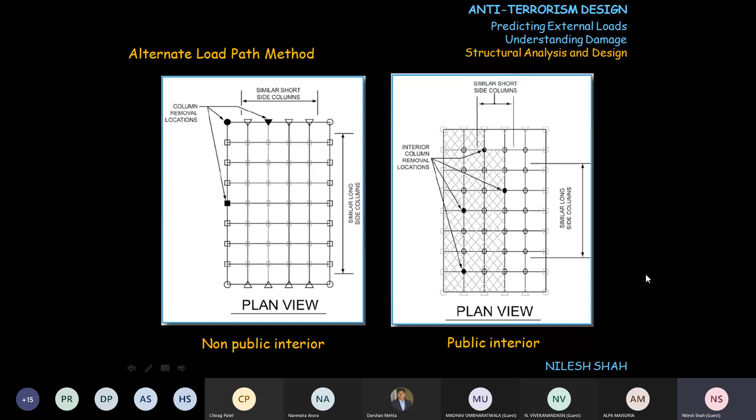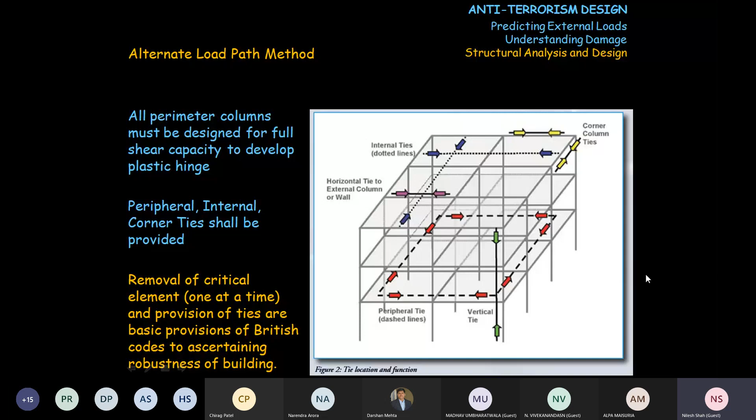This is only for columns that I have identified, but you can also identify beams along with columns and remove them one by one and still ensure that load paths are available to make the building stable under the action of predicted lateral loads, right? So this is what basically we mean by alternate path method to prevent a collapse of a building.

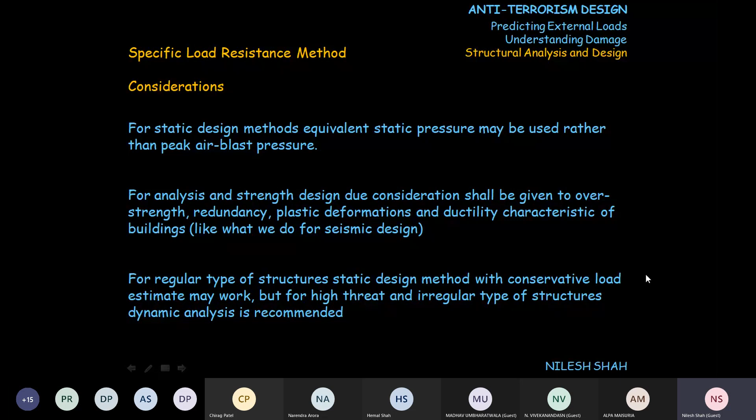For regular type of structures, the static design method with conservative load estimate works fine. But for high threat level and irregular type of structure, dynamic analysis is recommended. And most important is we should ensure alternate load path, right?

At the end of this presentation, I would once again say that we have only dealt with conceptual structural aspects, architectural aspects, and aspects related to engineering for anti-terrorism design. No mathematics involved in the presentation, no burden of those hi-fi equations, but just the concepts through which we can evaluate the load. We can identify what type of analysis is required for a particular type of building.

Interested persons or one intending to perform anti-terrorism design of buildings will do so only after in-depth study. The presentation did not include architectural considerations, utility considerations, that is MEP design, building envelopes, and building layout, security measures, perimeter protection, etc., which I feel are outside the domain of civil and structural engineering.

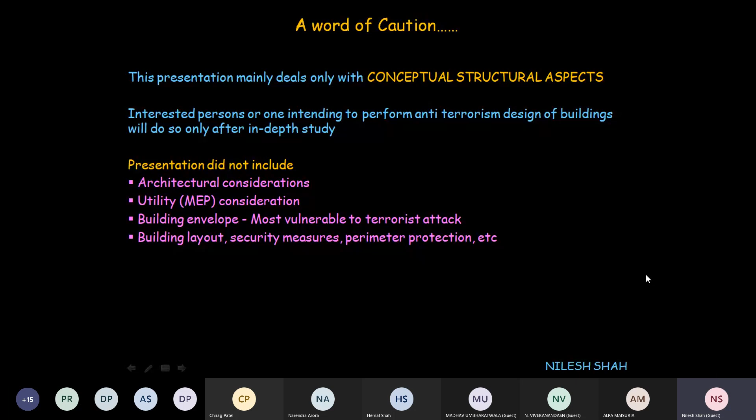First question is, if the standoff distance available is short or it has green cover, what one can do for design? What is the question? Can you please repeat that again? If the standoff distance available is short or it has green cover, what one can do for design?

Yeah, see, basic thing. This is an issue in anti-terrorism design that we need a minimum standoff distance of 50 meters. Whenever you talk about ATD, irrespective of low threat level or high threat level, the minimum standoff distance required is 50 meters. That is the first and basic principle of anti-terrorism design. It means that the explosion should take place at a minimum distance of 50 meters, because then we evaluate the lateral loads acting on the building and we can design the buildings accordingly.

If that distance is not available, then that particular facility we cannot identify as ATD, right? Because if you have an explosion of 100 kg of TNT just in the basement of the building, the whole building is bound to collapse. So we cannot call that an ATD. So along with structural hardening, it is very important that we also get other anti-terrorism strategies in place.